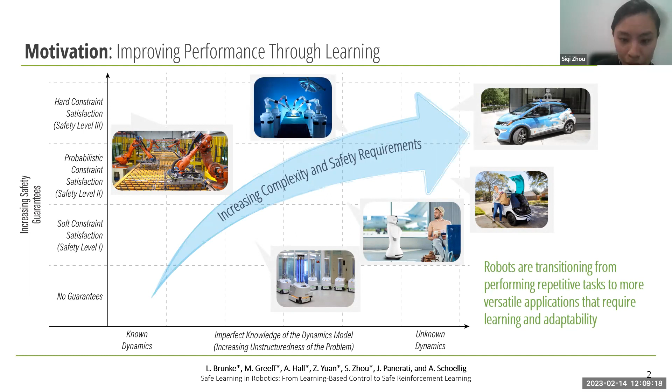In traditional applications, robots are programmed to perform repetitive tasks in well-characterized environments. However, in more recent applications, robots are expected to operate in increasingly versatile environments that require continuous learning and adaptation. We can also visualize different robot decision-making approaches in the literature over this 2D plot. Classical control approaches typically start with a prior model of the robot, and by exploiting the system structure, we can provide different levels of safety guarantees.

On the other hand, we also have data-driven approaches. In particular, reinforcement learning is the standard machine learning framework to address the problem of sequential decision-making under uncertainties. In contrast to classical control approaches, reinforcement learning can be applied when the model of the system is not known. However, providing safety guarantees can be typically more challenging. And recently, we see a trend where control approaches are integrated with data-driven approaches to improve the generalization and performance of robot decision-making algorithms while still preserving the desired safety properties.

In one of our recent survey papers, we summarized the recent literature into three categories. The first category is safely learning uncertain dynamics, where machine learning models are safely incorporated into standard control frameworks to improve performance. In these works, probabilistic or hard constraint satisfaction can be guaranteed. And we also have safe and robust reinforcement learning algorithms that encourage safe exploration in the learning process and achieve soft constraint satisfaction.

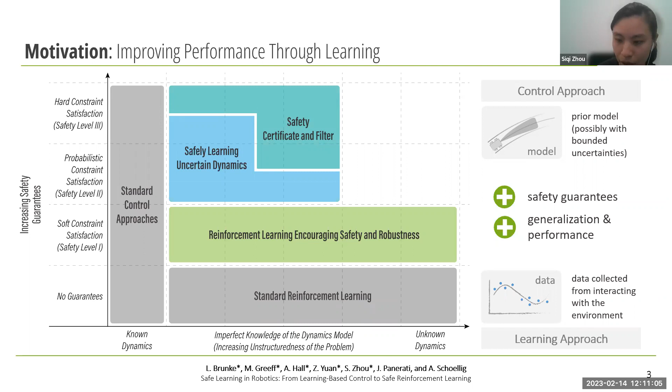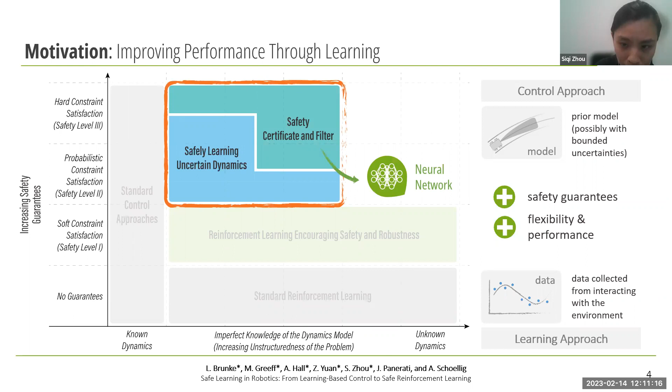Lastly, we have safety filter and safety certification methods that can be augmented to and thereby provide probabilistic or hard safety guarantees to learning controllers that were not initially designed to be safe. The work from my PhD generally falls under those two categories with a particular emphasis on neural network-based approaches. The goal of my PhD was to develop theory-driven approaches that safely and efficiently exploit the modeling capability of neural networks for robot control applications.

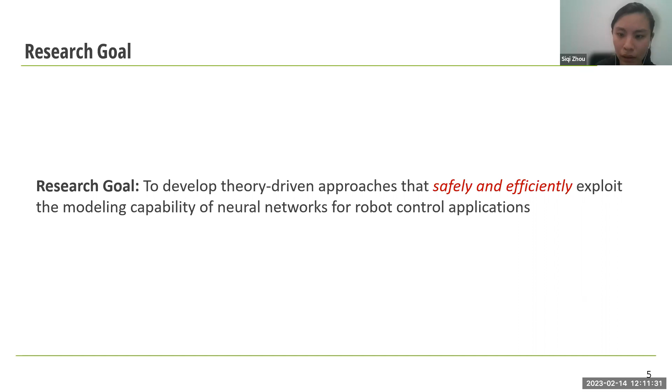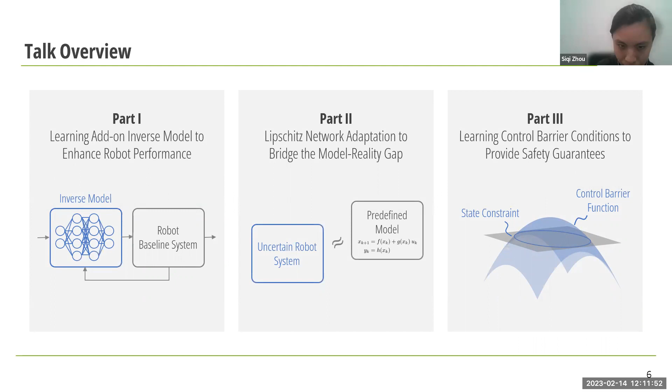And in this talk, I would like to share three works from my PhD. The first one is learning add-on inverse models to enhance robot performance. The second part is on Lipschitz network adaptation to bridge the model-reality gap. And the third part is on learning control barrier conditions to provide safety guarantees. We'll start from the first part.

In this part, we consider trajectory tracking problems, which are part of different applications such as UAV-aided inspection, automated manufacturing, and autonomous driving. In these applications, high accuracy tracking is often required for safe operation and optimized performance. And due to the nonlinearities in the dynamics, as well as unknown disturbances, achieving high accuracy tracking can be challenging. In the literature, there are different approaches to achieve basic tracking functionalities. The most common one is PID control. Despite its simplicity, it can be shown in theory that perfect tracking cannot be achieved for arbitrary trajectories.

On the other hand, we also have model-based approaches such as MPC and LQR that allow us to optimize the performance of the robot given a dynamic model. The performance of those model-based approaches, however, is often limited by the accuracy of the model. And lastly, we have adaptive control and robust control approaches that are targeted to address the issue of model uncertainties. But those approaches are typically restricted to systems with a particular structure or can lead to conservative performance.

In our work, we consider the following setup where we have a black box robot baseline system that does not necessarily have a good tracking performance, with an augmented system with a neural network inverse module that adapts the reference sent to the baseline system with the goal to establish an identity map from the desired output to the actual output of the system. In contrast to other learning-based approaches, in our work, we leveraged the existing controller available to the robot and used data to enhance closed-loop performance. This add-on learning architecture makes the overall approach more data efficient and also less prone to instability issues.

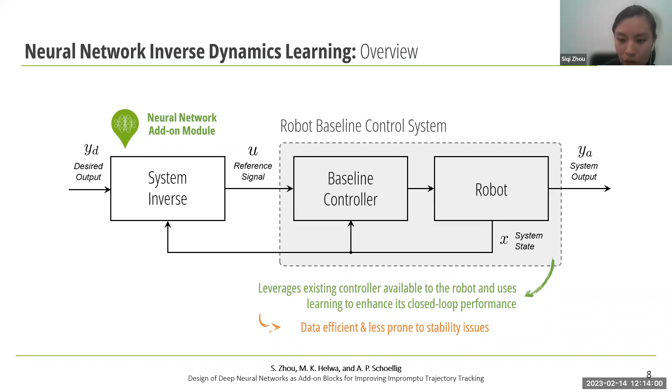Here's an overview of our approach. We assume that the robot baseline system is represented in the following discrete time control-affine form. From control theory, we can show that if we are at a state xk, the input and output of the system can be related as follows.

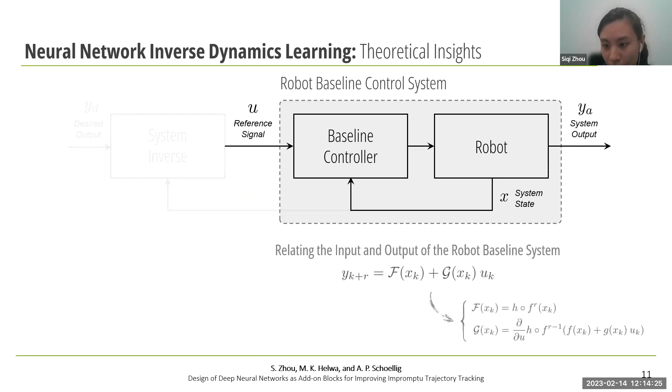Here, f and g are nonlinear functions of the state x, and yk plus r is the output of the system, r steps ahead. The variable r here denotes the relative degree of the system, and intuitively for a discrete system, the relative degree is the inherent delay of the system, or the number of sample delays between applying an input to the system and observing a corresponding change in the output.

Based on this input-output relationship, we can derive an inverse map to achieve exact tracking. And yd k plus r here is a future desired output. When the dynamics of the system is not known, we can train a neural network as an add-on module to approximate this inverse map based on system input-output data.

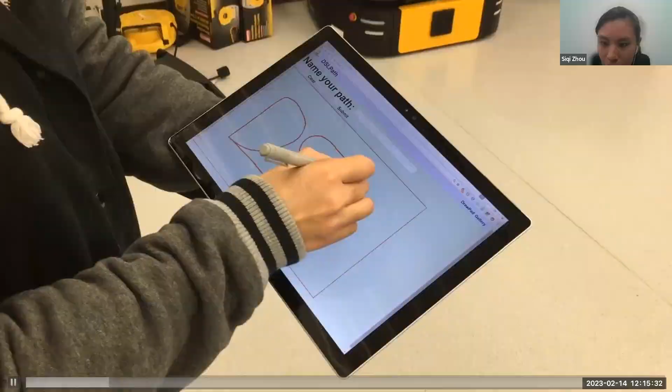Here's an illustration of the proposed approach. We verified the approach in quadrotor impromptu tracking experiments. And here the goal is to have a quadrotor track arbitrary hand-drawn trajectories accurately in single attempts. We first show the performance of the robot baseline control system.

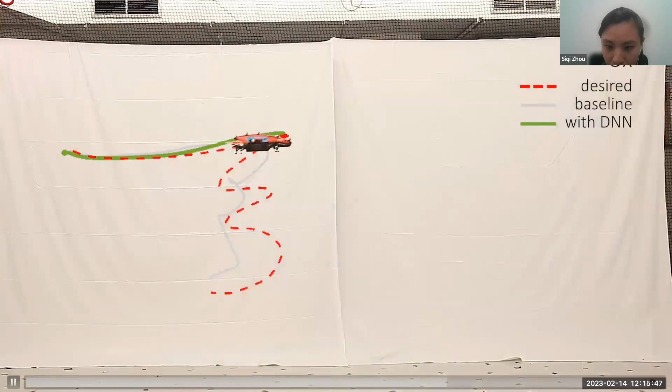And if we augment the neural network inverse module, we can significantly improve the performance of the robot. And this performance improvement can generalize to different trajectories. We overall tested the approach over 30 test trajectories and observed that the add-on module led to an average of 62% tracking error reduction.

Just to summarize, in this work, we propose a novel neural network inverse learning approach to enhance the tracking performance of black box robot control systems. In contrast to other learning-based approaches, the proposed neural network add-on module does not modify the underlying controller of the robot system and makes the overall approach more data efficient and less prone to instability issues.

And the proposed approach can improve the tracking performance on arbitrary trajectories. In our paper, we also provide a stability analysis of the proposed approach, as well as additional theoretical insights to further improve data efficiency.

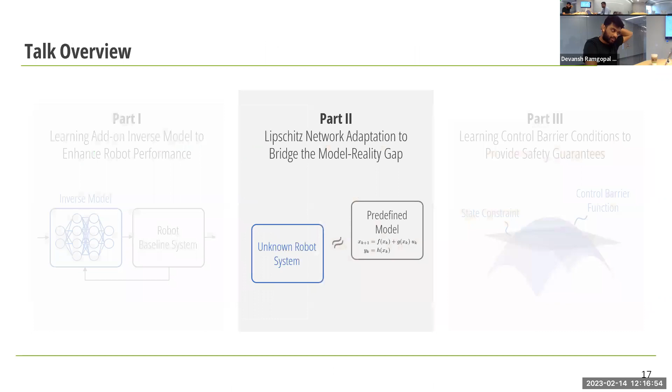Siqi, do you mind if I ask a little bit more about exactly what you were doing in this previous slide? If you go back one more slide before your video. One more. Yeah, okay. So here, for the quadrotor, you have some sort of baseline controller. In this case, I'm guessing that's doing the low-level attitude control. And your reference signal, is it like a desired position for the quadrotor? Is that what's going on?

For the quadrotor experiments, the baseline system is the PD position control, so it includes the position controller as well. But the PD gains are not necessarily well tuned for arbitrary trajectories. I see. Okay. So your desired output is like a position of the system?

Yeah, here's the position. But if you use differential flatness for quadrotors, then you need to have up to snap to be able to track a trajectory accurately. So is your inverse mapping essentially learning how to predict the snap or the higher derivatives of the desired output, or is it learning the robot's baseline control system and understanding where that error needs to be tracked better? What exactly is it?

So in this work, we formulated everything based on discrete time. So instead of relating the input and the higher derivatives of the output, we relate the future output r steps ahead. That's how we account for it. It's translated to an inherent delay of the system in terms of future output instead of the higher derivatives.

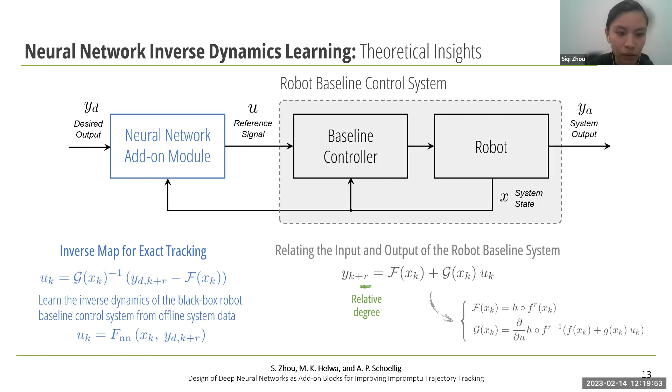Yeah. But I'm guessing you also need the K plus R time information for the actual state, right? Or do you only need it for the desired state, like desired output? It only requires the K plus R of the desired one. The input will be the state and the future desired output. Yeah, because this mathcal G is the sensitivity of the current control input to the future state.

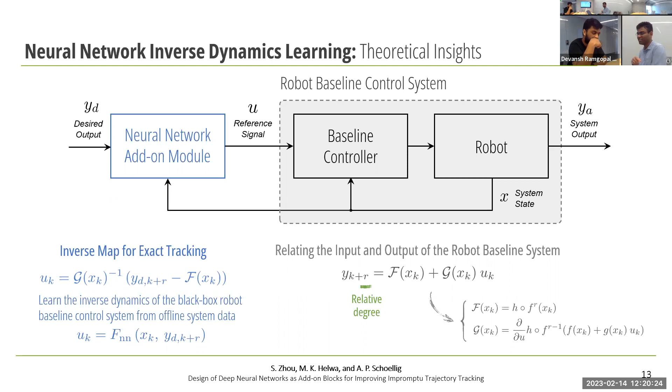Yeah. So by this inverse mapping G, you only need the current state and the current control input to do G inverse. Interesting. Yeah, that's very interesting. For the theoretical guarantees, you have to assume that G inverse exists, right? Yeah, we assume it exists, and also this wouldn't be sensible for nonminimum phase systems if just directly learning an inverse. In that case, we have to do some approximate learning.

Also, I'm guessing in this paper the whole neural network training is done online, right? I mean, the whole feedback and updating parameters is being done online. So how big is your neural network in this particular experiment? In this first work, it was offline, but in a later work, the Lipschitz network, that one is online. These networks are usually between 2 to 4 hidden layers, and neurons range between 50 to 128-ish. Okay, cool.

Yeah, thanks for the questions.

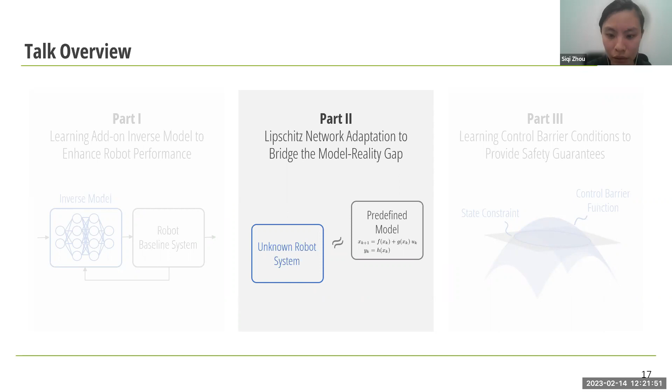So now we move on to the second part, which is Lipschitz network adaptation to bridge the model reality gap. In this work, our goal is to use online neural network learning to enforce an uncertain robot system to behave like a predefined model. The reference model can then be used in a model-based approach to realize a desired control objective. We first show the architecture of our proposed approach.

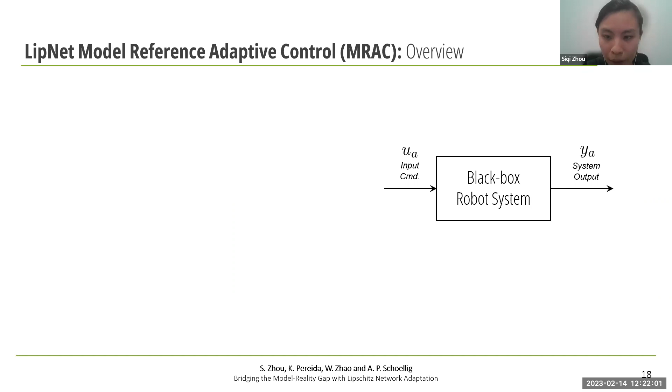We consider a black box robot system with input U and output Y. We augment the system with a Lipschitz network adaptation module with the goal to make the overall system from input U up to output Y behave like a reference model. This reference model can in turn be used by a model-based controller or planner to realize a desired objective. This work generally falls under the literature of model reference adaptive control.

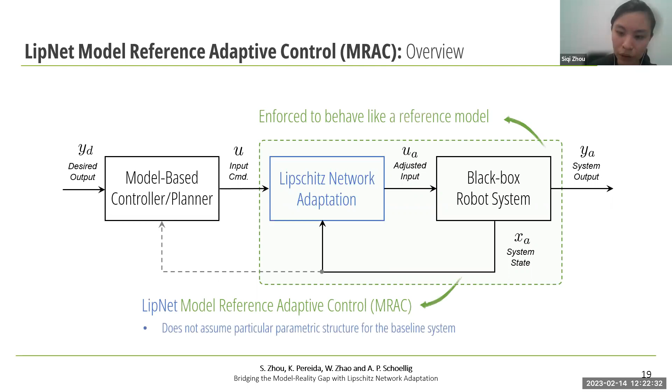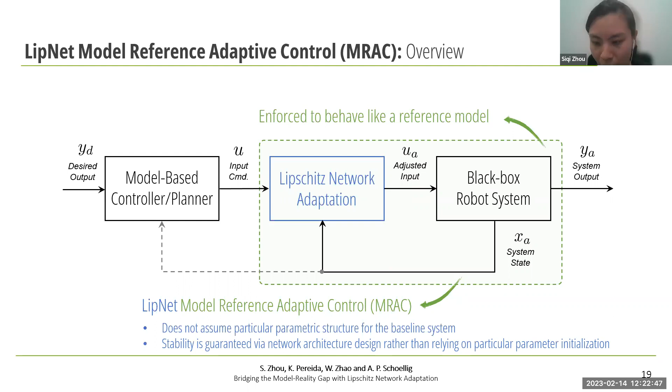In contrast to typical adaptive control approaches, the proposed approach does not assume a particular parametric structure of the baseline system. And in contrast to other neural network adaptive control approaches, we guarantee stability via the network architecture design rather than relying on specific network parameter initializations or update rules.

We similarly consider the robot system and reference models represented as control-affine nonlinear systems. If we know the dynamics of the robot, then we can derive an input correction map to make the robot system behave like the reference model. When the dynamics are not known, we design a neural network to approximate the input correction map. The parameters of the network are updated online to minimize the difference between the unknown robot system and the reference model output.

In this work, we use a special type of neural network called the Lipschitz network, which is guaranteed to have a predefined Lipschitz constant via the network architecture design. Based on the system properties, we can derive a certification condition on the Lipschitz network module to guarantee stability. In particular, if we assume the robot system is finite gain L2 stable, then the uncertain robot system with the Lipschitz network adaptation module is stable if the following condition is satisfied.

Here, L is the Lipschitz constant of the network, and gamma is the L2 gain of the system. This Lipschitz condition can be conveniently encoded in the design of the Lipschitz network. We show a numerical example to illustrate the advantage of the proposed Lipschitz network adaptation approach over a conventional network approach. In this example, we consider an unknown baseline system and a reference model given by the following state space models.

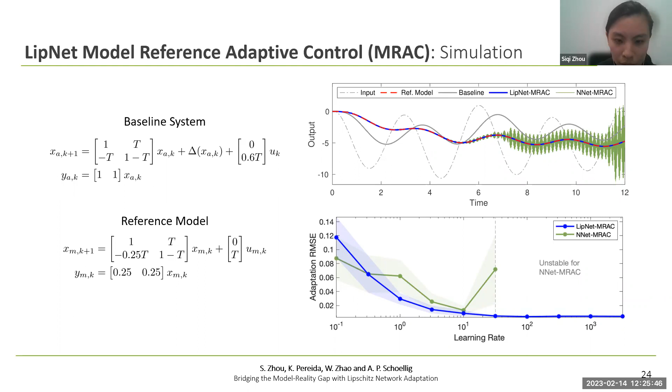For the Lipschitz network approach, stability is guaranteed through the architectural design. In this particular case, we see the adaptation error is lower as we increase the learning rate. We demonstrated our approach using flying inverted pendulum experiments, where a quadrotor is expected to balance a pendulum in the upright position.

The quadrotor we use in our experiments is an off-the-shelf platform, where an accurate model of the onboard control system is not directly available. We first show the baseline system performance, which is an LQR controller designed based on a simple acceleration dynamics model. Due to the model-reality gap, the standard model-based controller cannot stabilize the system.

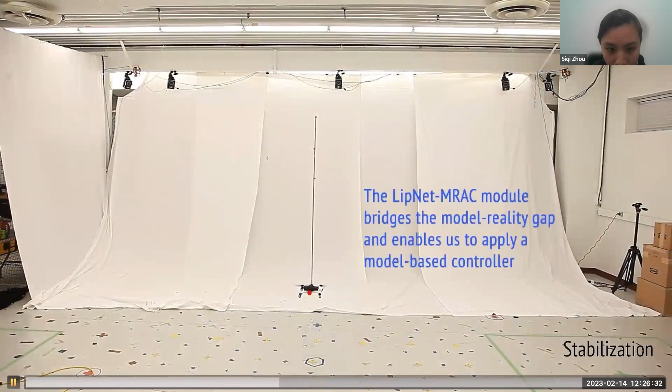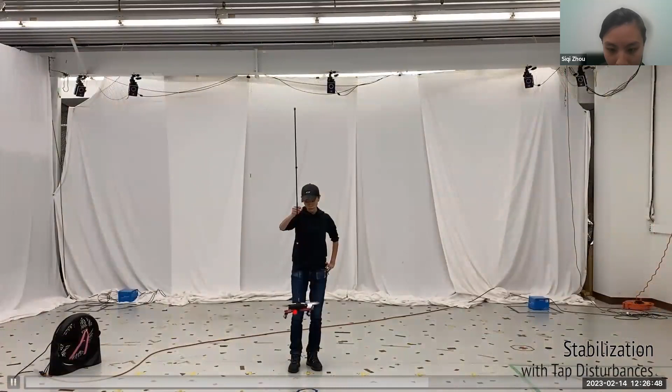Now we augment the controlled quadrotor system with the proposed Lipschitz network. We can make the overall system behave like a reference model and thereby bridge the model-reality gap for the LQR controller to be successfully applied. This overall controller can tolerate moderate disturbances such as wind and taps. The same controller also allows the quadrotor to track circular trajectories while balancing the pendulum in the upright position.

These are really cool experiments. Yeah, thanks. We have been working with quadrotors for so long, but I think we are still afraid to stand so close to them. It took a little bit of time to get to know the system and get it working.

So to summarize this part, we propose a Lipschitz network adaptation approach to make the unknown robot system behave like a reference model, which can be used by a higher-level model-based controller or planner to realize a desired control objective. The proposed approach does not rely on a particular parametric structure for adaptation, and stability of the approach is guaranteed via the Lipschitz network design. This was verified using flying inverted pendulum experiments.

In the first two works, we look at... Do you have questions? Can I ask a question? Yeah. Can you give a more qualitative understanding of why Lipschitz neural networks are so insensitive to the hyperparameter choice? So through the theoretical analysis, which is based on a small gain theorem kind of argument, we can show that. I guess whatever would help us imagine why Lipschitz networks have so much more stable learning compared to non-Lipschitz networks.

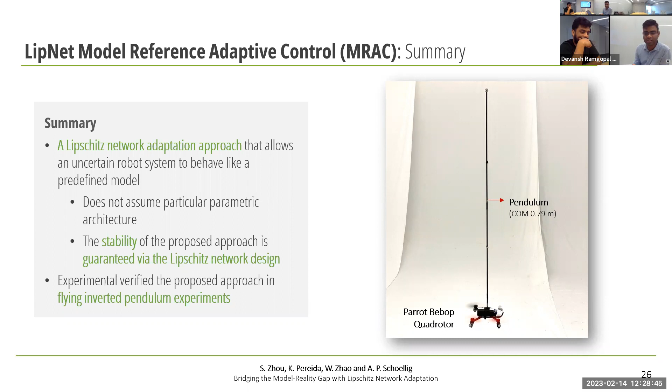Like the plot for feedforward networks versus a Lipschitz network, that was really interesting. Yeah, this one, the one on the bottom right. Are you asking why Lipschitz networks have Lipschitz constants, or why the Lipschitz constant is important to stability? Why having a Lipschitz constant for neural networks makes this learning so stable and well behaved. As you increase the learning rate, somehow they always improve the performance. The learning rate is the factor you multiply with the gradient in gradient descent, right? So how come a large learning rate leads to smaller errors?

So in this case we try to do faster adaptation. But I don't think there is a general performance guarantee to this approach yet. We can in general guarantee that the overall architecture will guarantee stability, and if we choose the learning rate to be high, we adapt to the observed error quicker, and that's why we observe a decreasing trend. But it also depends on how good the overall learning is to achieve this kind of asymptotic behavior. One thing we can guarantee from the architecture is stability.

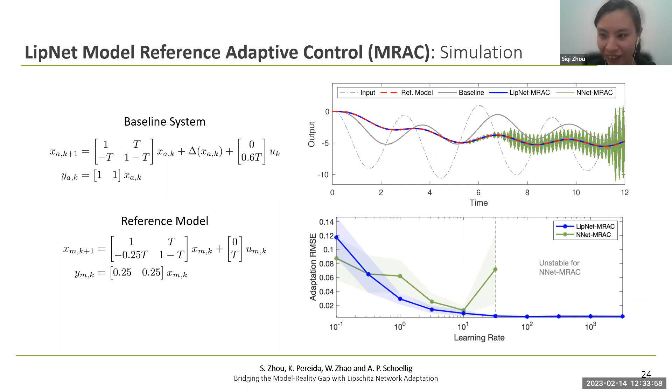Sorry, the voice was a little bit cut off, I think. Because if not, sorry, what was that? That way, as the internet might not be too stable. I think some of your words were cut off. I might be on the wrong network. Yeah, I'm gonna reconnect on the Wi-Fi, would be better. Okay. Hi, can you hear me? Yeah. Sorry, I was on the wrong network. I was still connected to my lab, even though it's on the other side of the building. Nice. Yeah, okay, that's cool. That makes sense. I think I missed half of the comments you had before, but if you have more questions, you can... No worries. Yeah.

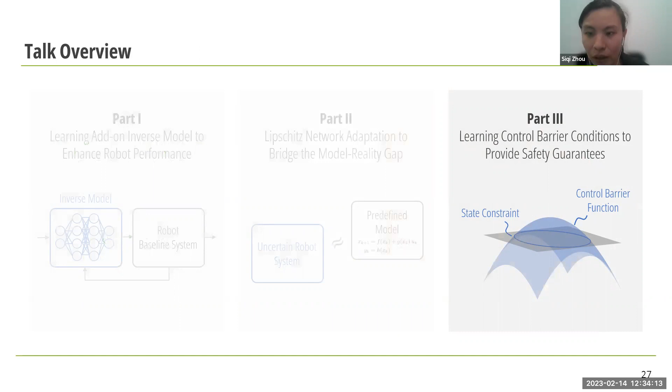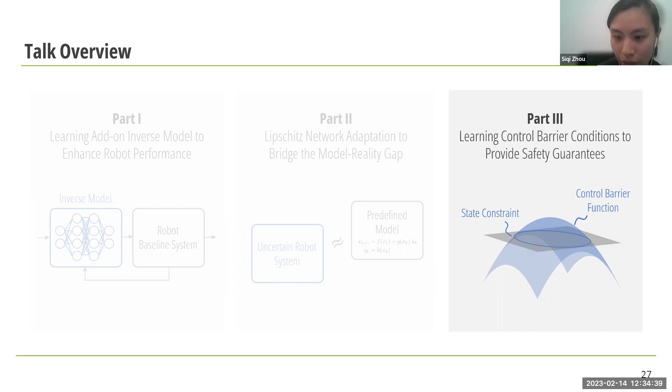So in the first two works, we look at how we can use neural networks to systematically improve performance of closed loop control systems. And then the last part is a newer work from our lab. It's on learning control barrier conditions for providing safety guarantees to uncertified controllers. That can be, for example, a learned policy represented by black box models. This work is in collaboration with Lucas, who will also give a talk later in this seminar series.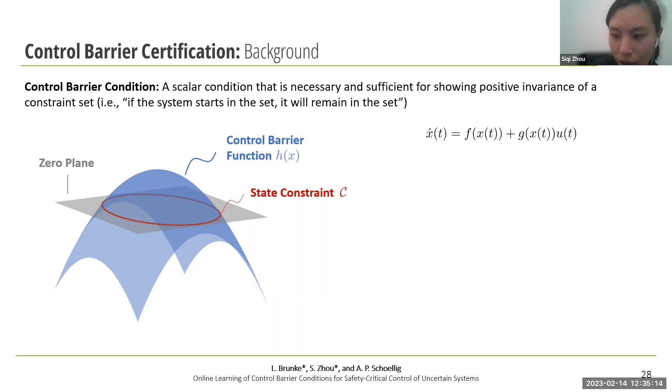This condition ensures that the Lie derivative of the CBF is non-negative on the boundary of the safe set. And inside the safe set, the Lie derivative is lower bounded, which constrains the rate at which the state of the system approaches the boundary. We similarly consider the quadratic program for safety filtering. Here, the objective function encourages the optimization problem to find an input as close as possible to the raw input computed by the learned controller, and the constraint guarantees that constraint satisfaction is achieved.

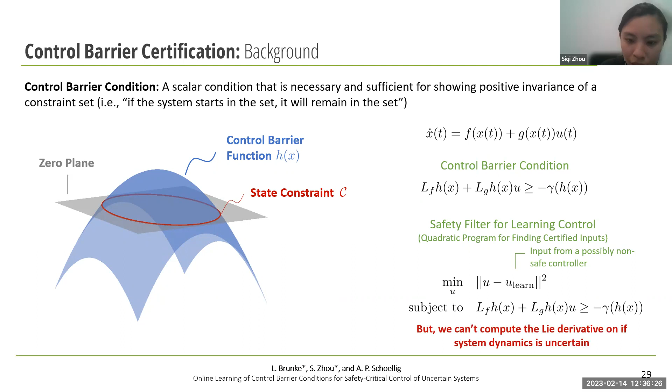As many of the learning works are motivated by the fact that we do not necessarily have exact knowledge of the dynamics of the system, this would also be a problem to use this framework. In particular, we cannot directly compute the Lie derivative if the system dynamics is not known. So in this work, we considered the case where the dynamics can be decomposed into a nominal part denoted by F bar and G bar, as well as an unknown part denoted by delta F and delta G. We further assume that the nominal system is safe on the constraint set and has a known control barrier condition.

We propose a Bayesian linear regression approach that exploits the structure of the CBF condition. In particular, we approximate the uncertain part of the Lie derivative in the following form, shown in red, which holds a particular basis function, a composition of a Lipschitz continuous function and the control barrier function. Given this structure, we can derive a lower bound in the form that maintains the original CBF condition structure.

In this work, we update the BLR model online and use the learned CBF condition to filter unsafe inputs. Here, the first term is the estimated Lie derivative, and the second term is the bound on the Lie derivative error. And the first term on the right-hand side is the class kappa function associated with the nominal system. And the second term is the bound from the learning component. And this condition generally guarantees that the original uncertain system can be rendered safe.

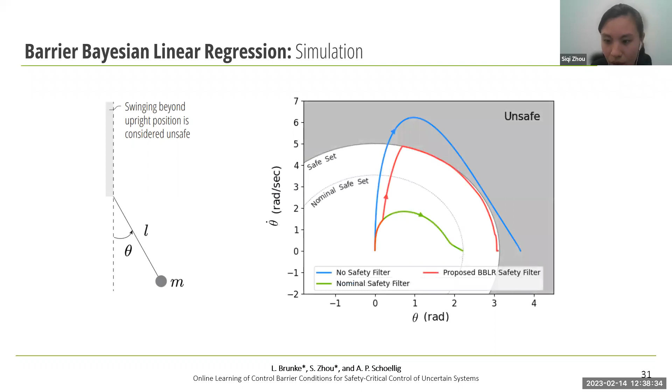We illustrate the proposed approach with a simple pendulum example, where the goal is to swing up the pendulum to the upright position while not going over. Here we show the response of a baseline uncertified controller. If we use a safety filter designed based on the nominal system, then we can guarantee safety, but the performance is conservative. And if we use the learned BLR safety filter, we can certify safety, but not significantly jeopardizing performance. And the overall performance of the system with a safety filter is similar to the case where we design a safety filter directly based on full knowledge of the system.

So as a summary, in this work we propose a Bayesian linear regression approach that exploits the structure of CBF conditions and can be used to certify safety for an uncertain system. And this approach was demonstrated using an inverted pendulum in simulation. I believe Lucas will also talk about this work more in detail and also our follow-up work, which we are working on right now.

Cool. Do you have questions for this work? So you've got unknown and uncertain dynamics in this? Yes, at least uncertain dynamics. So in this case, what sort of uncertain dynamics have you added? So we assume this is additive uncertainty. So we have a nominal part and then an unknown part is added to the nominal components. And do you assume some bound on the maximum amount of this delta F and delta G? Yeah, we do need to know a bound, which kind of boils down to the Lie derivative error, to guarantee that this is certified in a robust way.

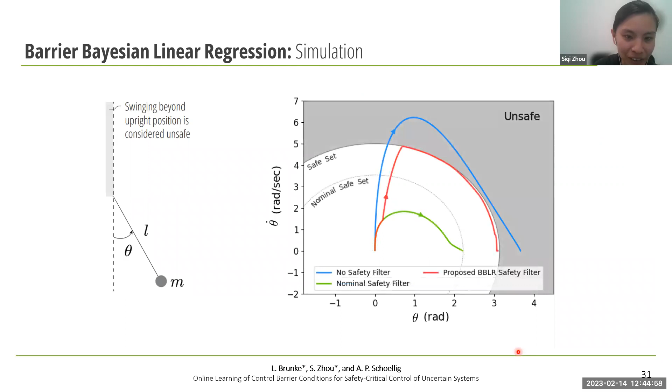Okay, I just have a couple of conclusion slides. So as a conclusion, in my PhD we explored learning-based control approaches that combine control theory and machine learning, and demonstrated in experiments how we can use data to improve performance of classical control systems, and also how to leverage control theory to guide safe and efficient implementations and provide stability guarantees to learning-based control techniques.

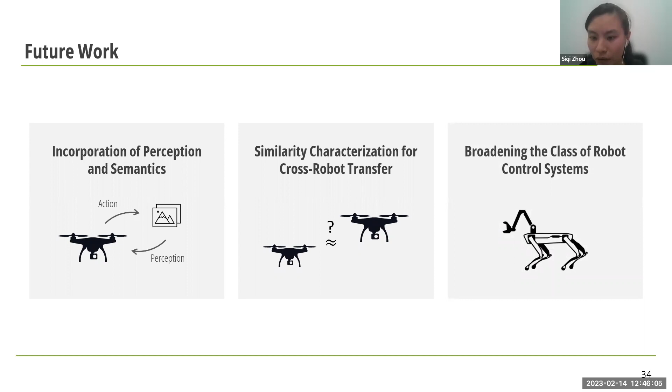And there are a few interesting extensions, some of which will be my postdoc research direction. The first one will be incorporation of perception and semantics in the controller design. Another interesting direction will be further investigating the characterization of similarity for nonlinear robot systems that can be efficiently estimated using minimal data online, and also extending some of the approaches to a broader class of robot control systems, such as systems with hybrid dynamics.

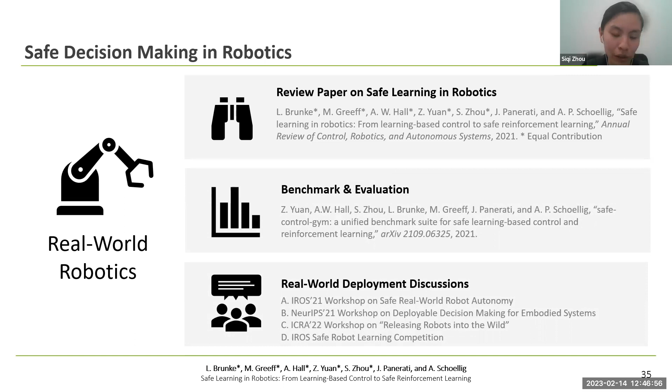And lastly, I would like to highlight a few efforts from my lab around the safe decision-making in robotics project. We started off with a survey paper on safe learning in robotics, where we summarized safe decision-making techniques from both the control and the reinforcement learning communities. As a follow-up work, we proposed a benchmark suite to compare control and safe reinforcement learning approaches on the same basis. And we have also been organizing workshops and competitions around safe learning control. We'd be very happy to hear your feedback and comments, or potentially collaborate or co-organize some of the events. That's really cool.